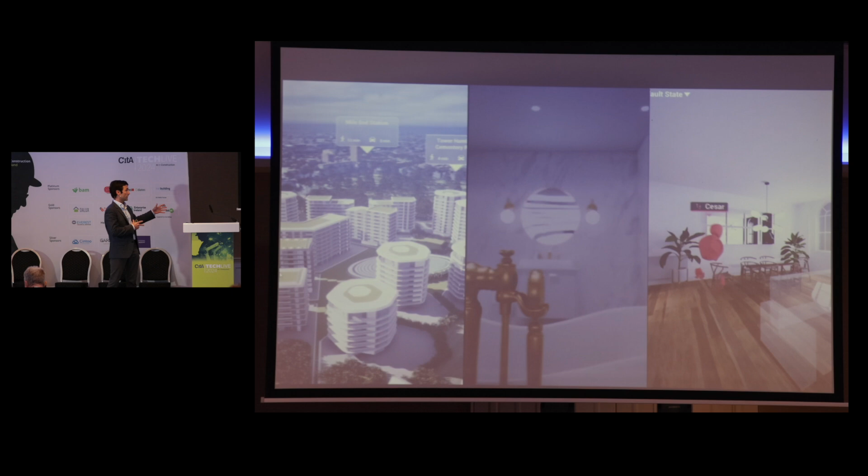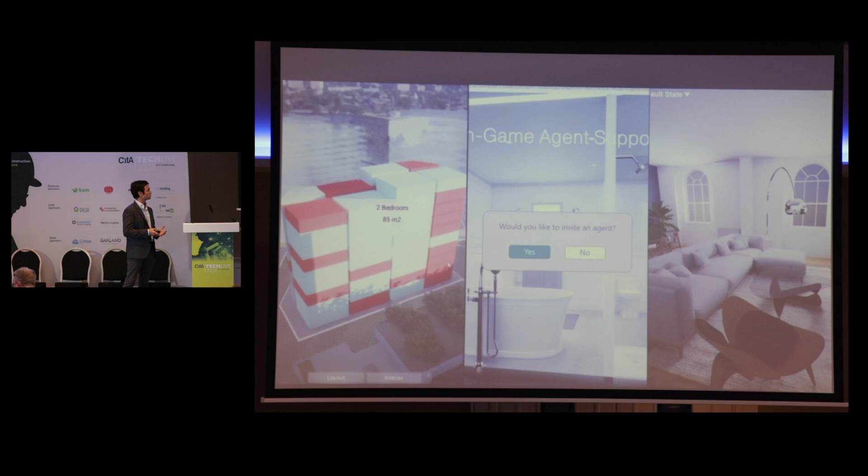We leverage a lot on our core business through automated design solutions, enhanced virtual experiences, and user participation in the form of exterior and interior configurators. We provide different bespoke solutions that are all cloud-based, could be real-time rendered, and we basically create a full software stack of solutions that, depending on our client's needs, we can adapt to.

One of the things we've touched on today is why are we doing this? One thing is to do things faster, cheaper, but we're very interested in making things better. So one of our main objectives with this technology is that we can actually go towards a mass customized future. And these are not necessarily new ideas.

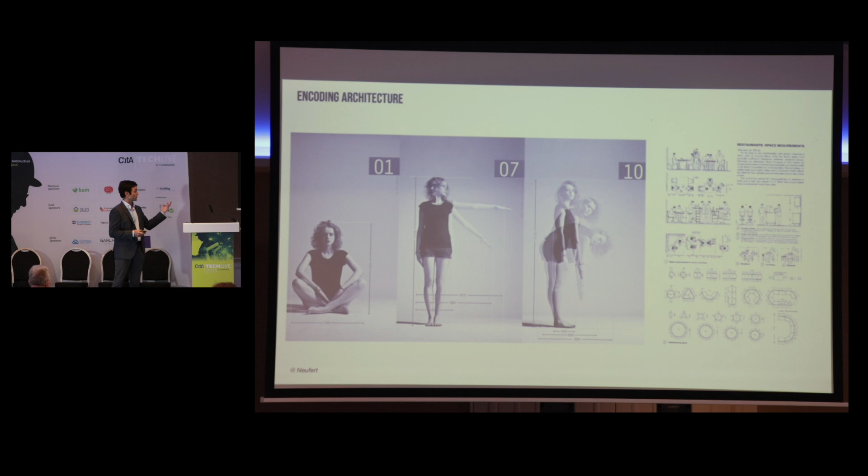Christopher Alexander, back in the 70s, wrote a book called A Pattern Language. Neufert as well, back in the 1930s. Probably if there are any architects here, you've been exposed to one of these books.

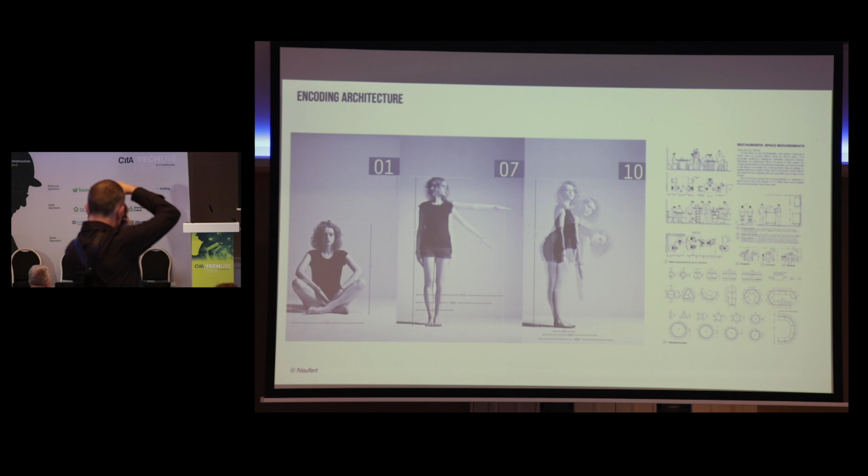So this has been very computational. At the time, there was not the technology, but this is all rule-based. How can we encode architecture into a set of rules? It's all ergonomics, it's all space-oriented. It's a system of relationships, right?

On top of that, the construction industry, especially the offsite sector, has learned a lot over the past decades from the automotive industry. Back to Henry Ford's assembly line in the 1920s, which was quite disruptive. But there are still years ahead to learn about fully automated factories.

Some things that have popped up in different conversations are about engaging buyers and mass customizing the future and the product, right? Like we can see in a way, buildings that could be configured differently. So that's something we started adopting as well in our core value.

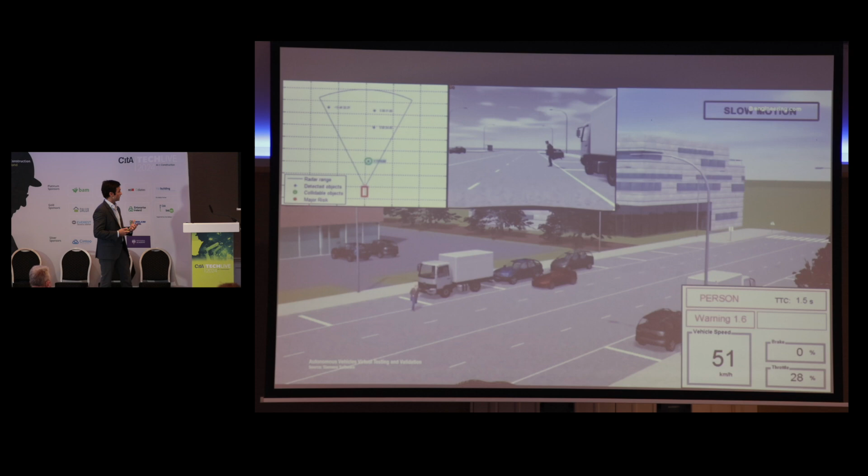A lot of these digital twinning simulations that these companies are creating bespoke to them are helping them design and simulate their next prototype, something we have to embrace and learn. Now, we stand on the shoulders of giants.

I started this journey after having a good career at Zaha Hadid Architects in the computational design group, where I was exposed to many projects, from competition all the way to construction. We had to create bespoke software to generate a lot of these complex geometries, and also create—I'll show you a couple of them—one is a configurator for modular housing, even though it doesn't look like it. But it was this intersection of knowledge that helped set the foundation of Alter.

Now with these projects—this one is made in Roatan, Honduras island. It's basically a small community of residents that came together, all modular, all made in timber in a robotic factory that is going to be shipped into the site.

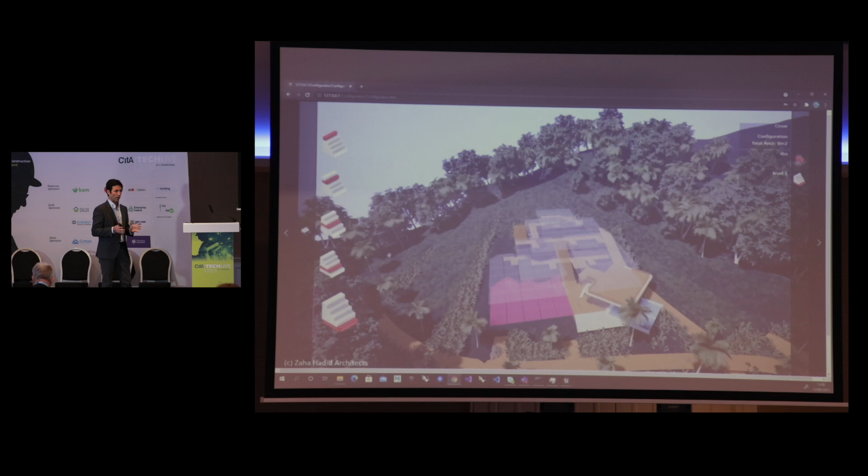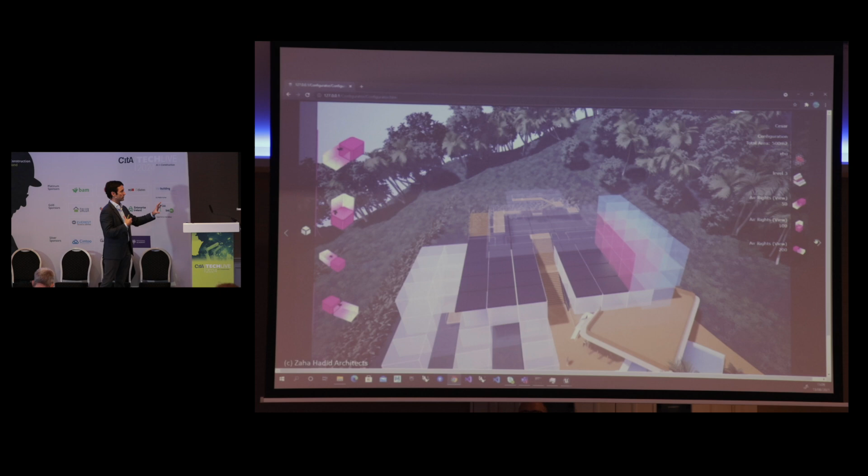In this case, we created a configurator just to understand a bit the requirements of the people who are going to live here. They had the option to select where they want to place a unit in the stack. As architects, we didn't want people just putting whatever they want wherever, but this served as a data gathering mechanism so we could start laying down the options—if I prefer a wide layout or a loft unit.

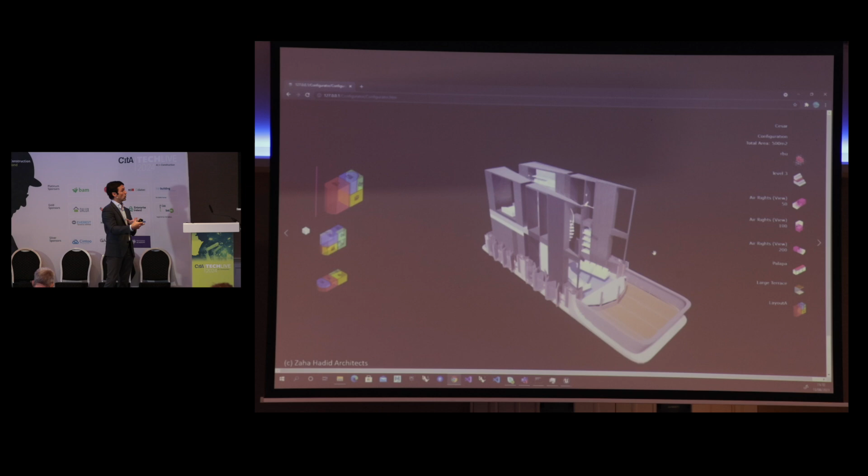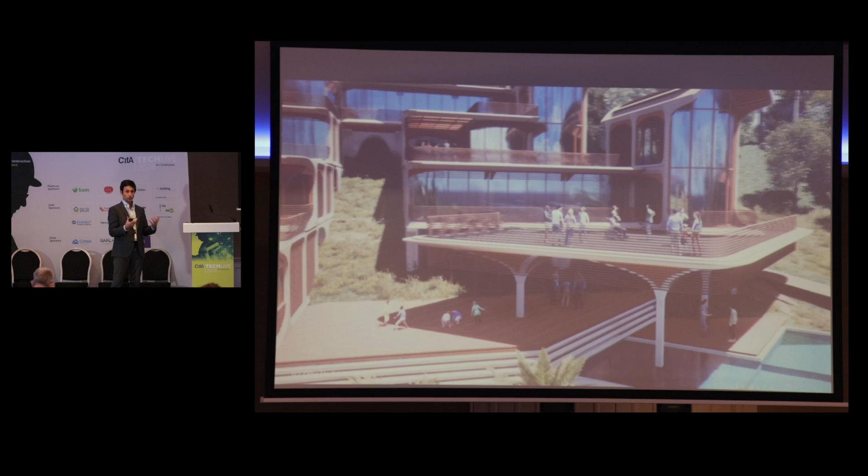If I prefer to spend a bit more on having a bigger terrace or a palapa roof, all this data then helped design and put together a community that came together cohesively, but also respecting what the people in this community were interested in. So it's about generating better designs through this system and through all the kit of parts that would assemble these projects.

Now, another project which I was quite fond of.

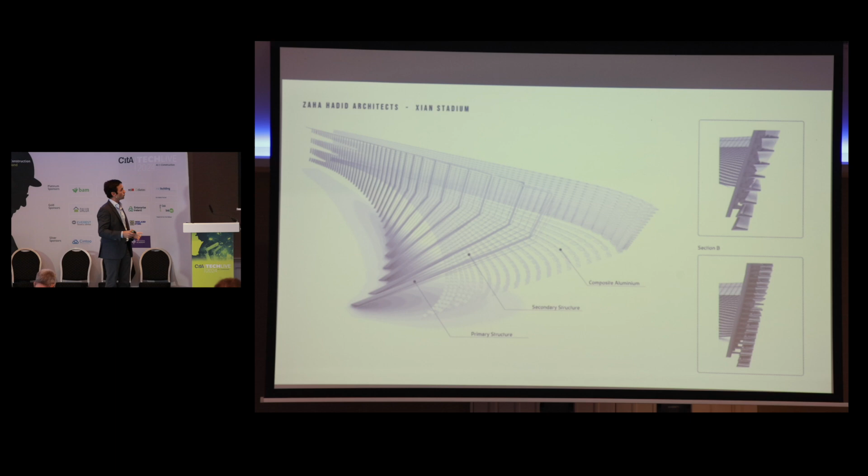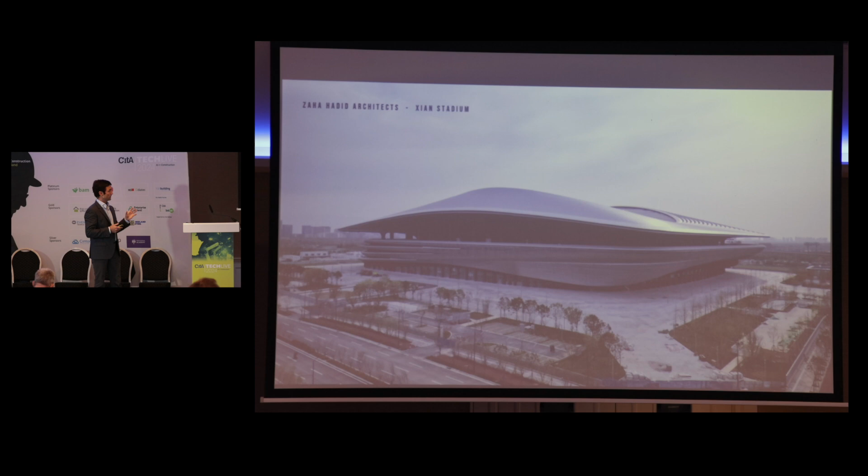This took less than 3 years to design, from competition all the way to construction, and it was only possible through computational design tools. The input of the whole stadium was only one curve. So reconstructing all the geometry all the way to the bolts and all the parts, having different AI clustering algorithms that would help shape and find families and rationalize all the design into basically a little kit of parts or components, while always respecting the final design intent. So back from the louvers to the paneling roof, that's all that knowledge wrapped up and created.

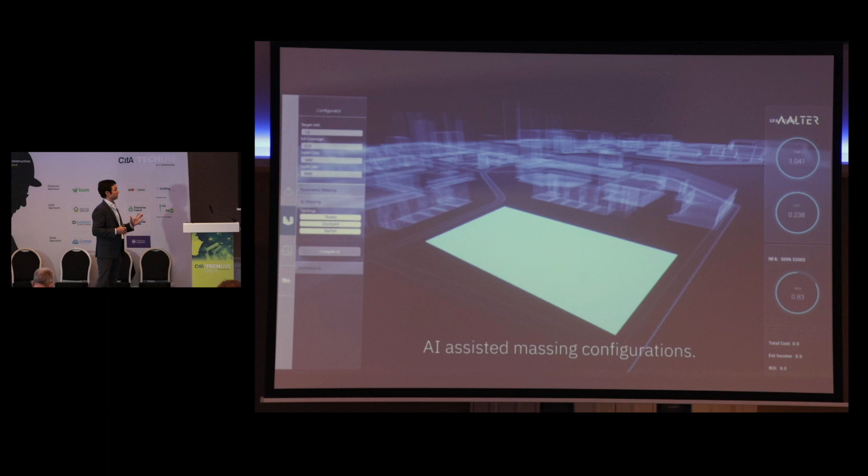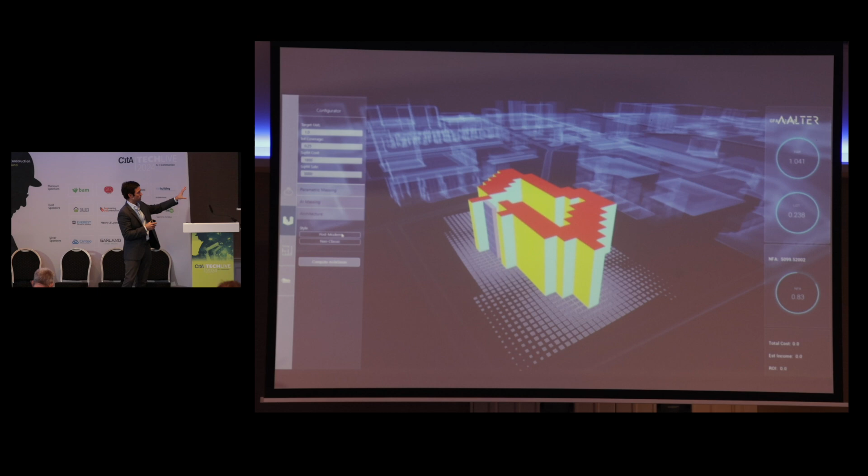So the first demo was still at CitA when I put this one together. It was basically collecting data from OpenStreetMap, so you can start generating and reconstructing different areas of the city, then select one site. Based on different zoning variables, an evolutionary algorithm would optimize different metrics—in this case financial metrics—but also within the bounds of zoning regulation and radiation constraints, analyzing solar radiation while it does all the analysis.

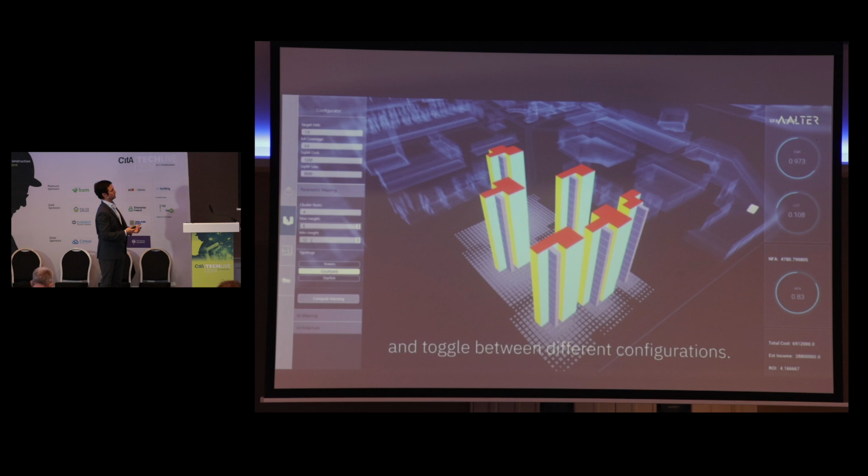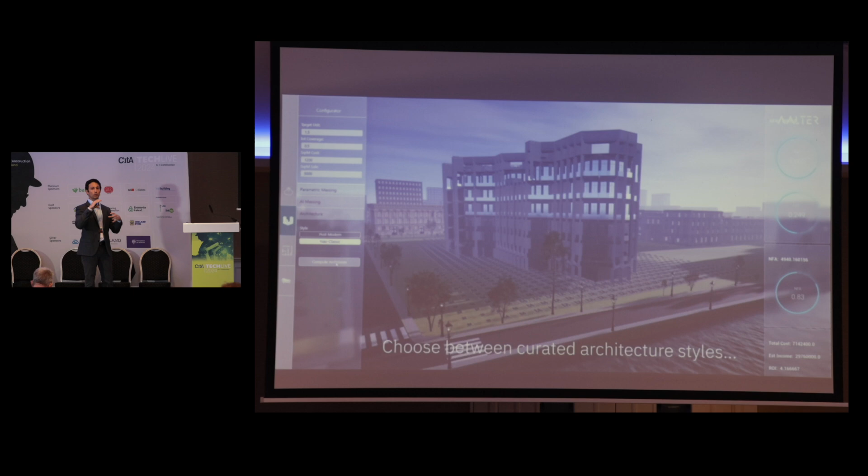But also as a user, you would want to override the system, so you could actually manipulate the parameters within a very easy to use UI—this is all cloud-based as well. Then very quickly, from a specific massing, you can have all the components out of a kit of parts, mapped, and you can swap very quickly between different architectural styles.

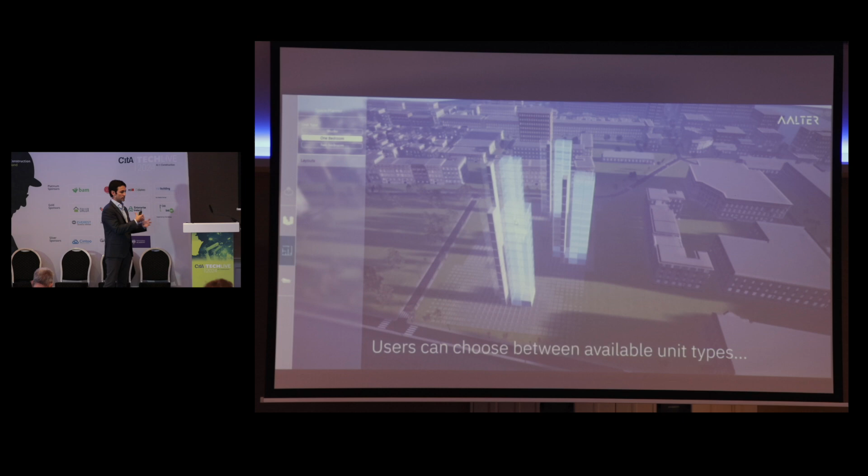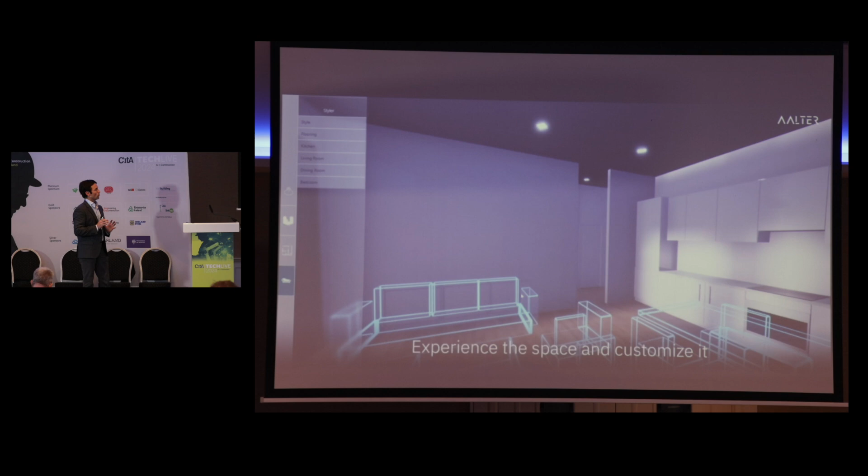Now the next module that lives separately is basically this tool that you can engage with for off-plan sales, or as a property manager you can start bringing in different people. Then we can establish the rules, whether we want to allow some sort of flexibility in the layout without affecting any MEPs or structure.

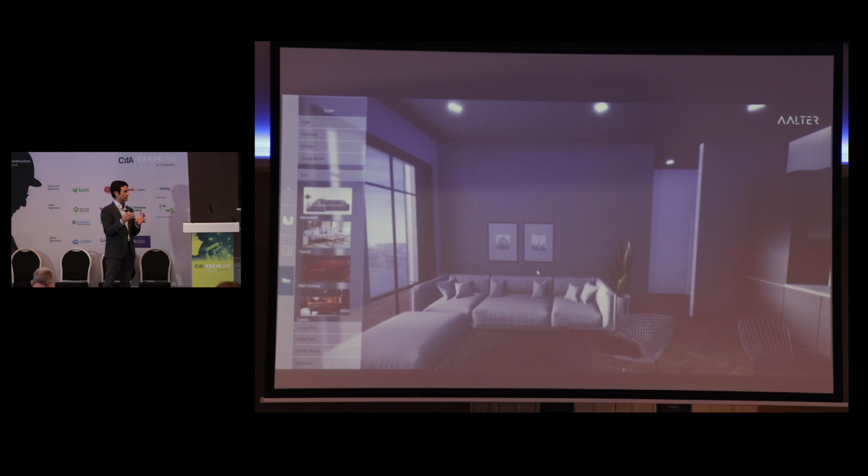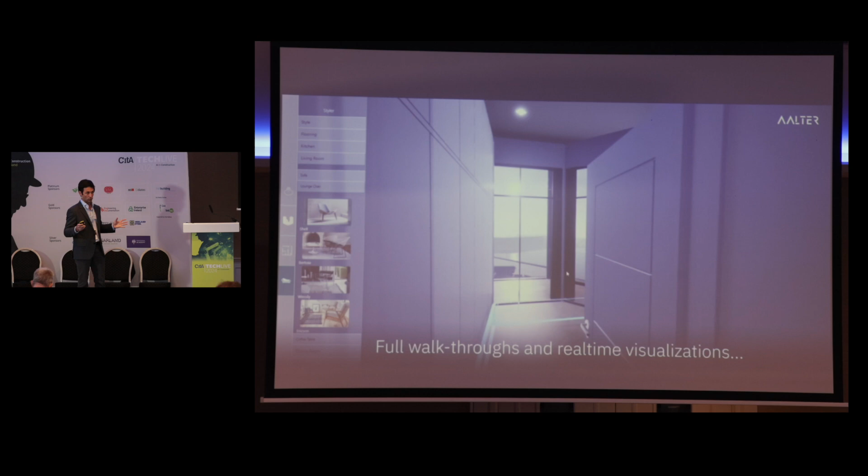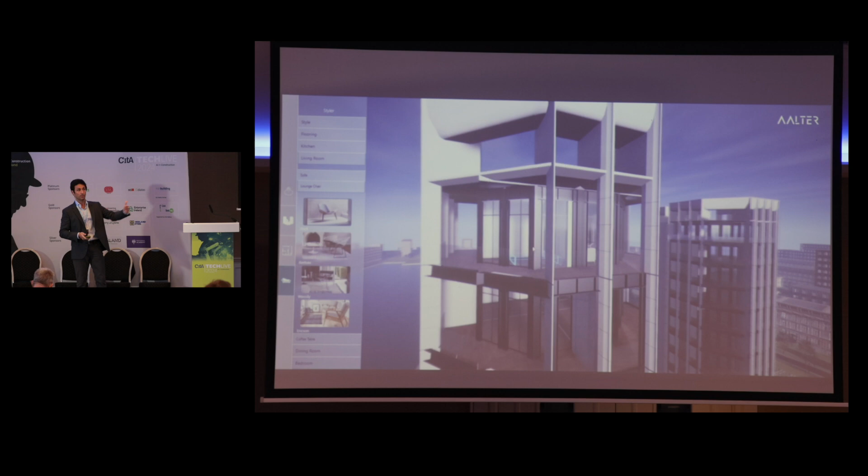And then having inbuilt interior design templates pre-curated, connected to databases of home suppliers, so we can very quickly allow customization for the users, and then experience each of these units as a first-person viewer in this property. It was like an enhanced experience, so you could be in any location of the property and see what the view would be, and what your neighbors or prospective neighbors are actually doing in their spaces.

Now all of this is wrapped in the vision of making expert design accessible to anyone—anyone could be literally like anyone. And the mission is to create better designed spaces, sustainably built, uniquely tailored to meet all those individual needs.

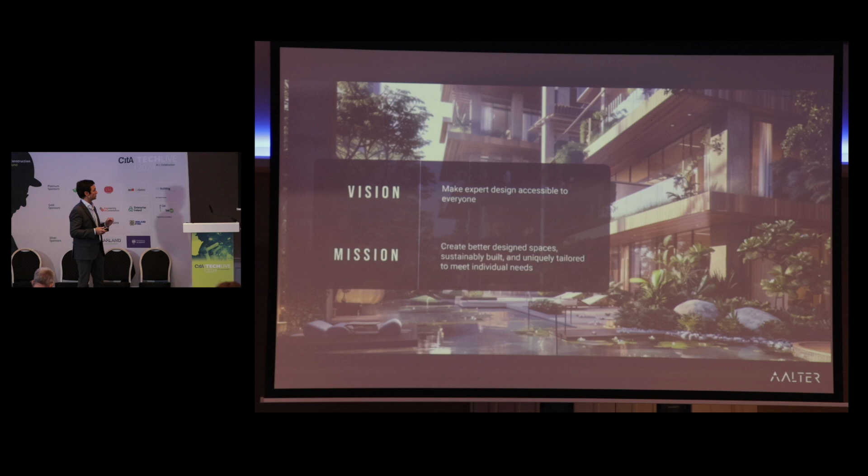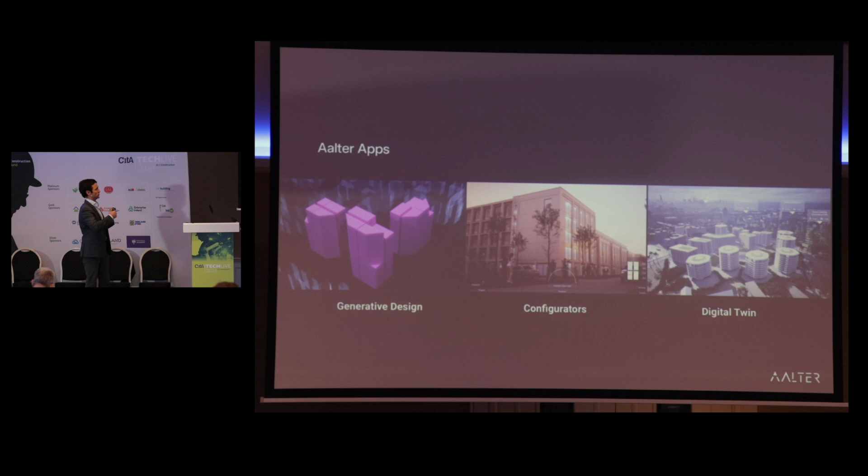We provide catered solutions to different stakeholders, all the way from the developer to offsite manufacturers, architects, home suppliers, all the way to the final homeowner. We stack these—we basically have a core technology that is modularized, and it can be grouped into 3 big themes: generative design up to the planning stages of a project, a connected configurator, and then something that basically lives on its own, a pseudo digital twin. It doesn't have all the sensor information, but it's something that lives, connects, and engages with the stakeholders and buyers early before it gets built, or even some of our clients are using it to manage their properties.

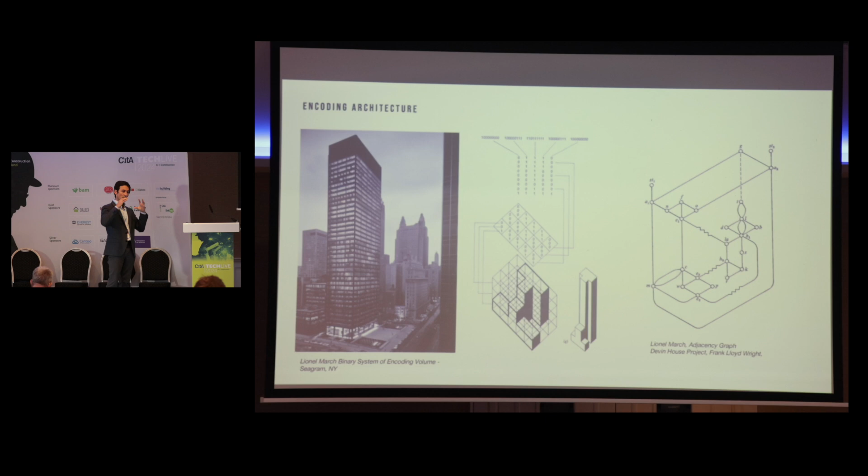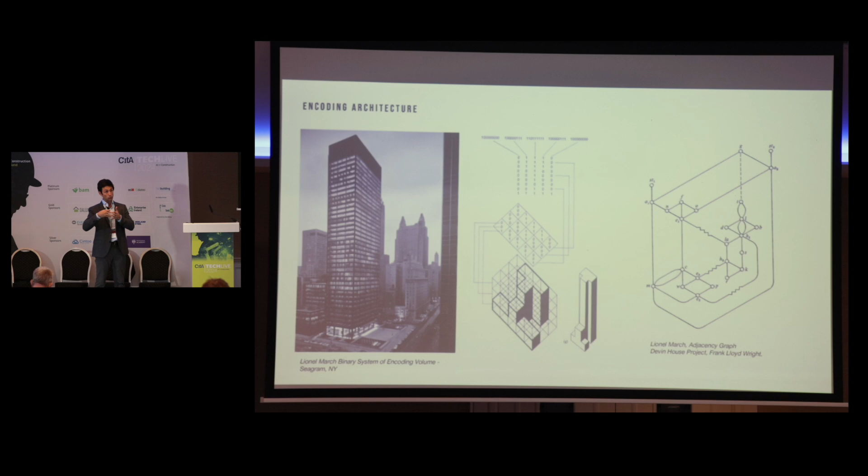Now one of the things we've realized is important is how do we encode architecture and how do we encode a building. We've been involved with academia for a while, and this is also not new—a lot of technologists and people that know software systems would be familiar with graph systems and graph theories, a system of connectivities. That's the way we've been abstracting a building and an architecture, and serializing all our data into a set of components that has a set of relationships not only between themselves, but also with the urban context.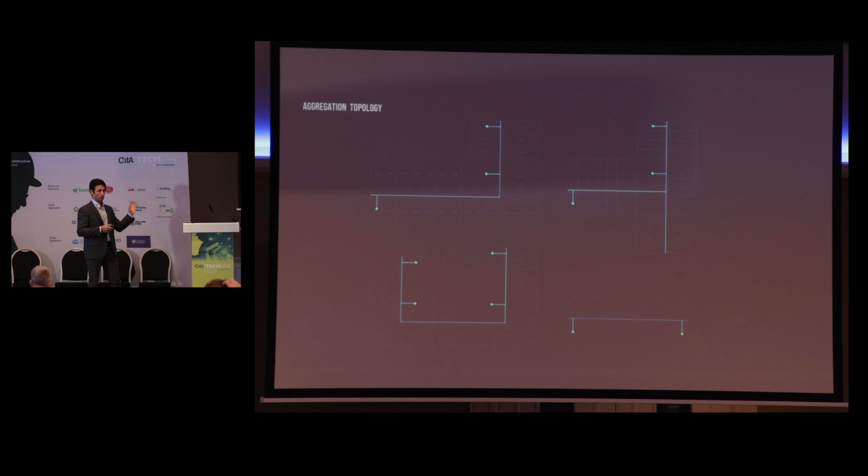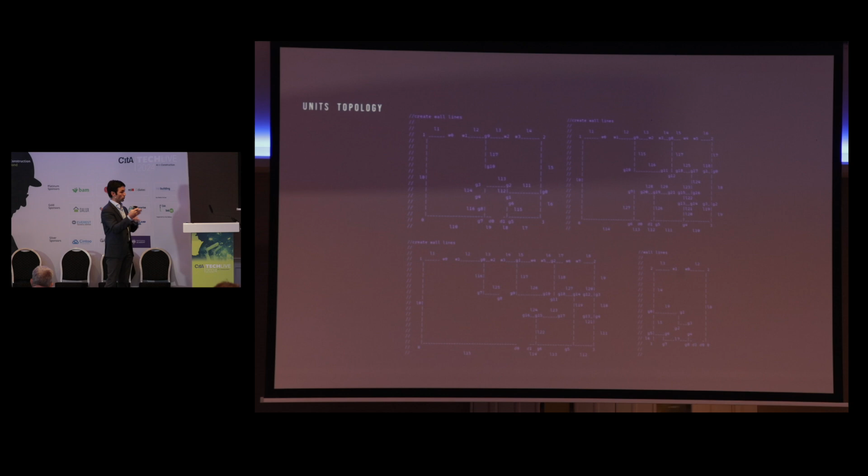So that way we can very quickly and easily start computing different options of layouts for different buildings, computing different fire escape distances at different scales, and also the layout of each of the units, where we can start identifying or quickly generating, procedurally, all the interior walls for any property. Each interior or each wall would know if it's an interior, if it's an exterior, if it would have any MEPs associated.

So all the labeling process that's been done manually, we can just encode. These we can adapt to anyone. One of our clients does modular housing, focusing on PBSA, student accommodation. We've created a system that can quickly adapt to any site, any condition.

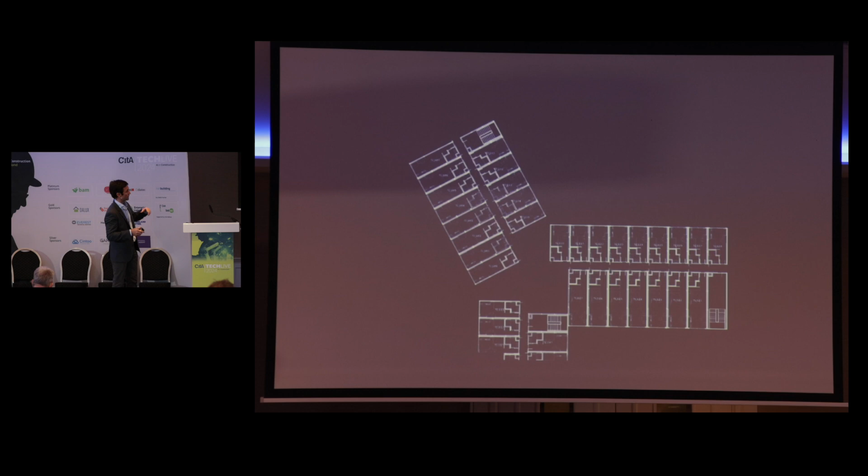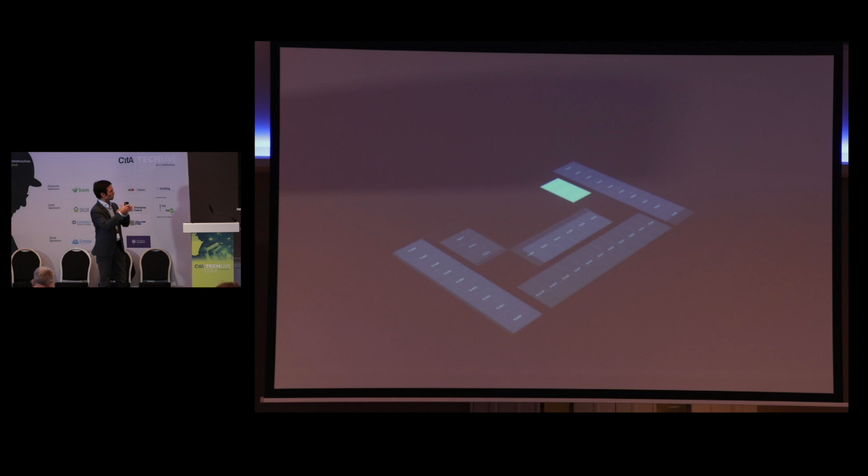It will start computing fire escape distances. It can also map or adjust to consented schemes or different sites, and it will run different generative evolutionary algorithms, sort of an AI, optimizing to find the correct parameters to maximize the target - net sellable area, target mix ratio - and then produce all the kit of components that can be easily exported to BIM.

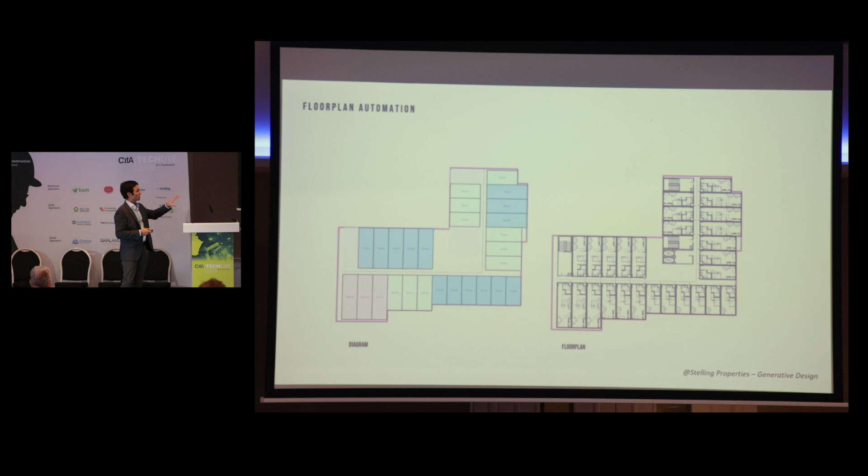As software developers, we're quite interested in speed, so we can go very quickly between levels of detail, out of diagrams that have all the metadata needed to then very quickly iterate and create all the CAD information and layouts, but also most importantly export all the real-time data, schedules of accommodation, bill of materials, in real time.

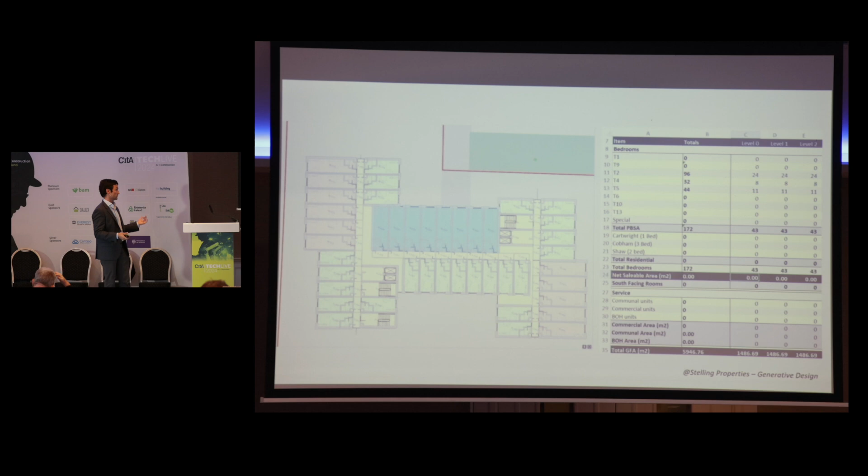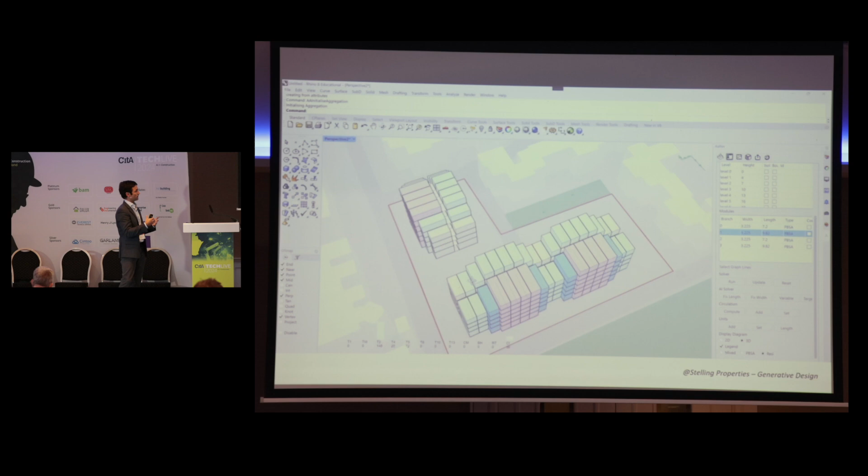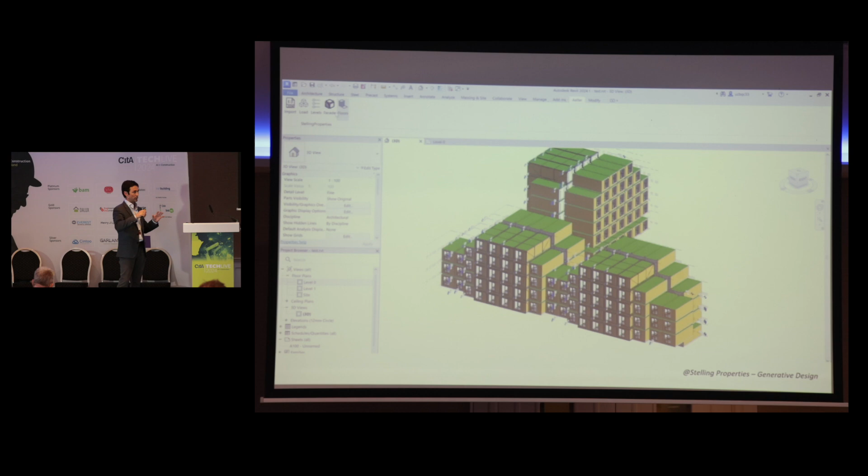It's very important to allow humans - either ourselves or the designers using the tools - to quickly modify and shape the buildings, and then all the information would be parametrically reconstructed. Being an agnostic software company, we leverage a lot of data, so we can easily move all these components between your preferred software.

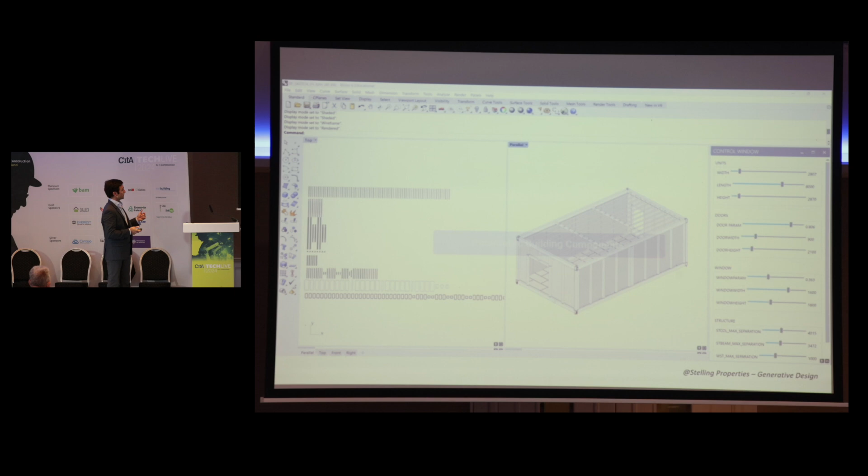So we can export from one to another - in this case, it was Revit. Depending on the client's requirement, we can also start parameterizing all the building components back to the bolts and how these sets of relationships work.

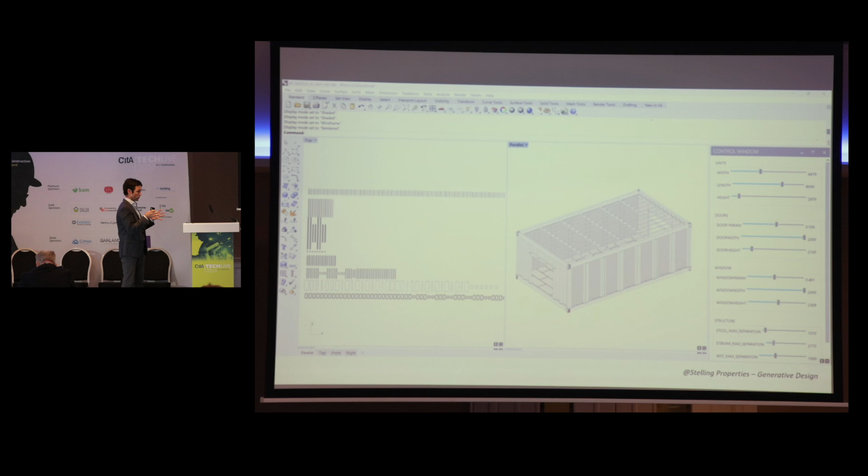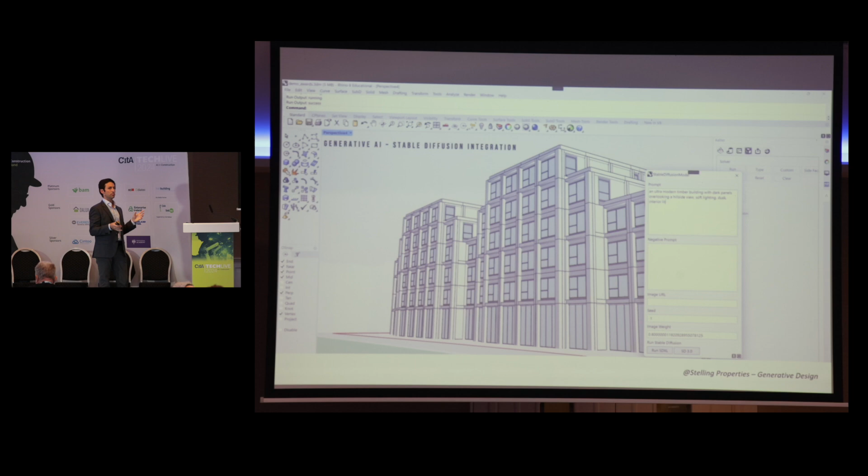Since the master system now has the overlay of all the units, the next level system can discretize and deconstruct all the components of the units, back to the panels, back to the bolts, to get bill of materials. Some of you might be familiar with Midjourney and ChatGPT image generation.

Right now you can prompt something and get an image, but it's quite uncontrolled. How do we build this? We reverse-engineered it in some way, so we've been training our own custom generative models in order to match the parametric model.

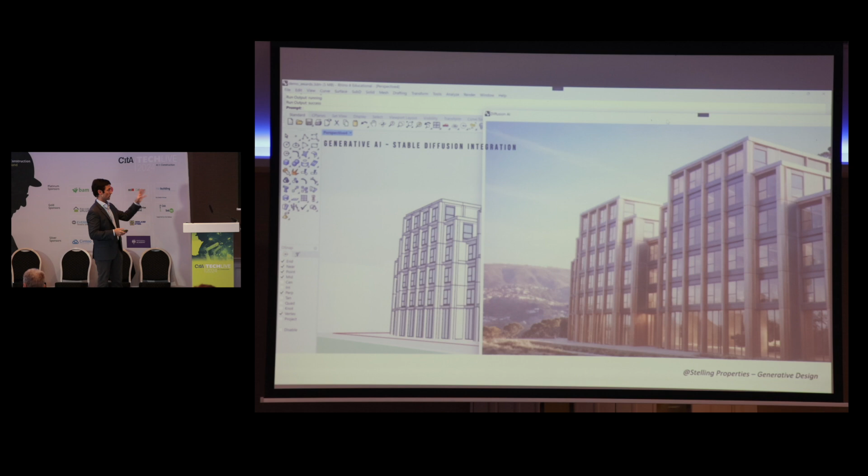That's why we can organically create some of these diffusion models, trained to our customers' styles, and also matching the parametric model information. That's why we have a lot of control - we can always have the same site, the same building view, every time we iterate over prompts in different styles.

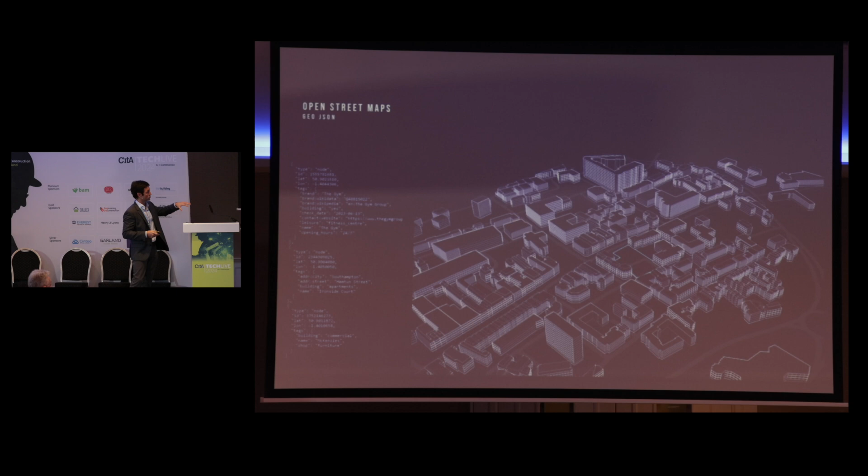Now we could go even further. We can get OpenStreetMap data, reconstruct cities in 3D, extract all the diagram information, view analysis, height analysis, and start automating all of these.

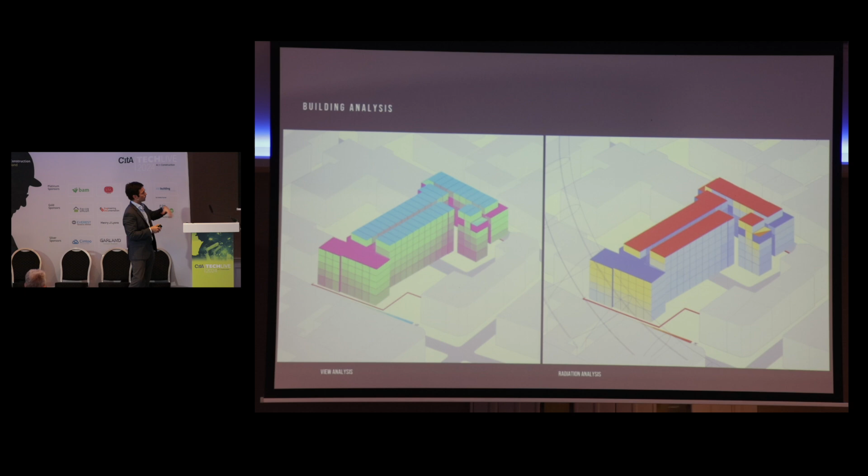This has been quite useful for planning applications or site identification for some of our clients. Or we can run anything we could compute or quantify, such as environmental metrics, solar radiation, view analysis for each of the units, so we can optimize, or train the algorithm to optimize for any specific measure. We're going to add carbon emissions and wind analysis very soon.

That's something some people have been interested in. Since we are quite young, we're looking to find strategic partnerships, and these first partnerships are helping us shape the platform to their specific needs. We want to add value very early on.

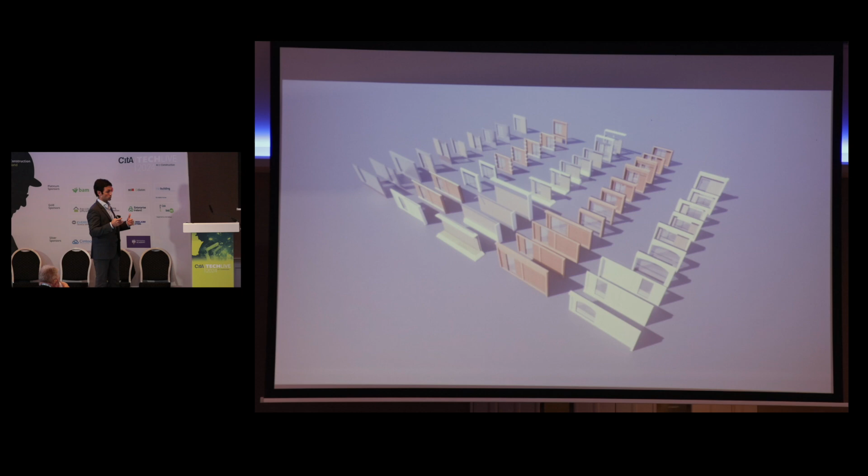Now, on the configurator side, our system works through a kit of parts, so we can design with our clients a different style set of kits, based on different massing options that were done by the generative tool.

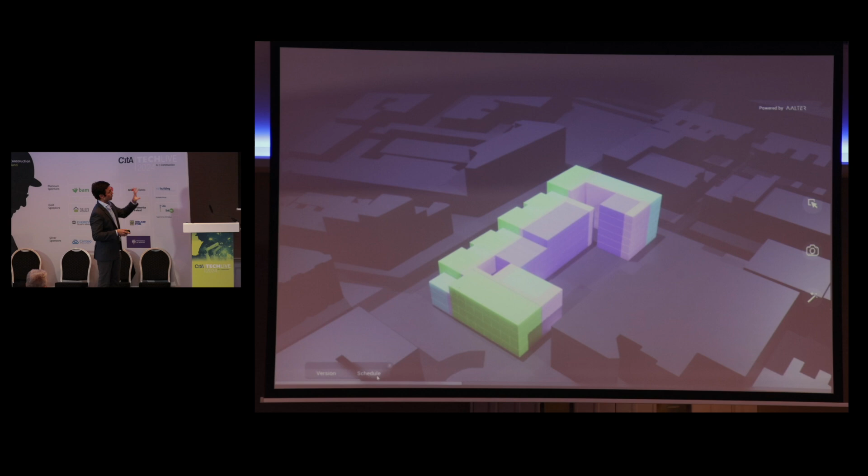From the cloud-based platform, this runs straight from the web. For a user that isn't technically drawn to CAD, we just create a very easy-to-use interface that they can toggle between all the design studies that have been pushed by the designers.

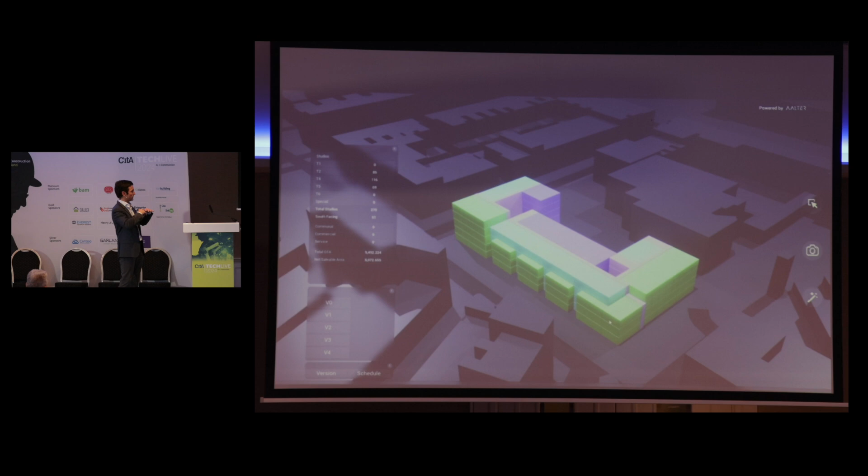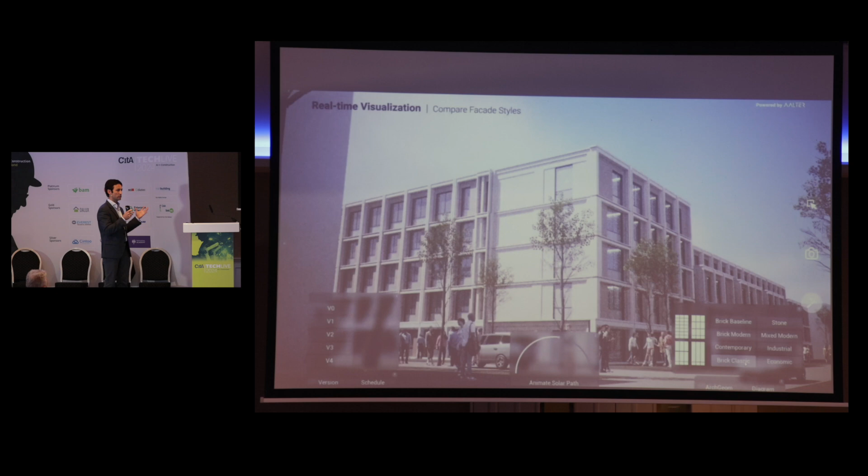And then they can start visualizing this in a real-time rendered platform. They can run different solar analysis, but most importantly, they can start actually swapping between different kit parts, so you can see how that building would look in that specific location.

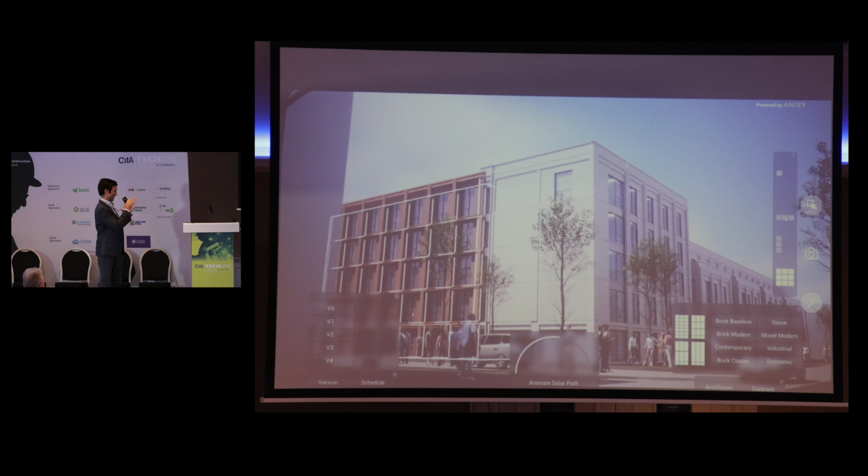You can start not only changing the kit, but you can say you want to fix a style, and then iterate it back again through all the massing versions that has all the metadata and information of that specific site. Then also start customizing parts if you want to make the building slender, or change some materials.

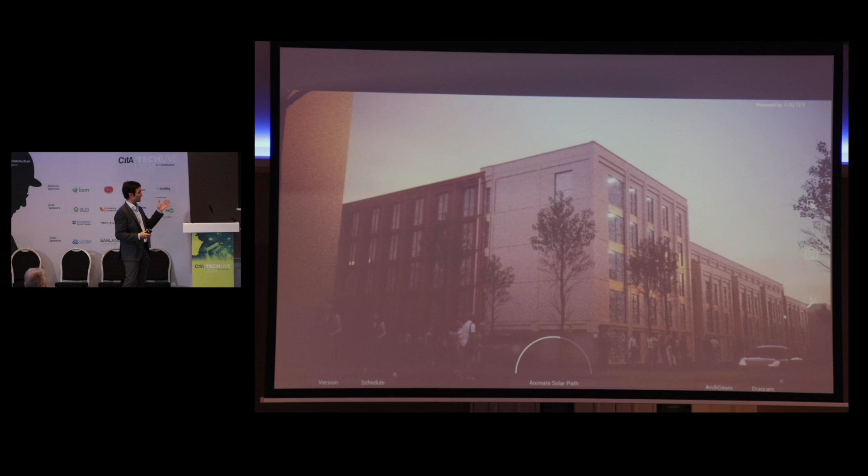All the sites, all the props of people, trees, it's all procedurally generated, so we can automatically export CGIs out of these. It's a realistic CGI, something that our clients were outsourcing before, now they can have a tool to export all of these in-house.

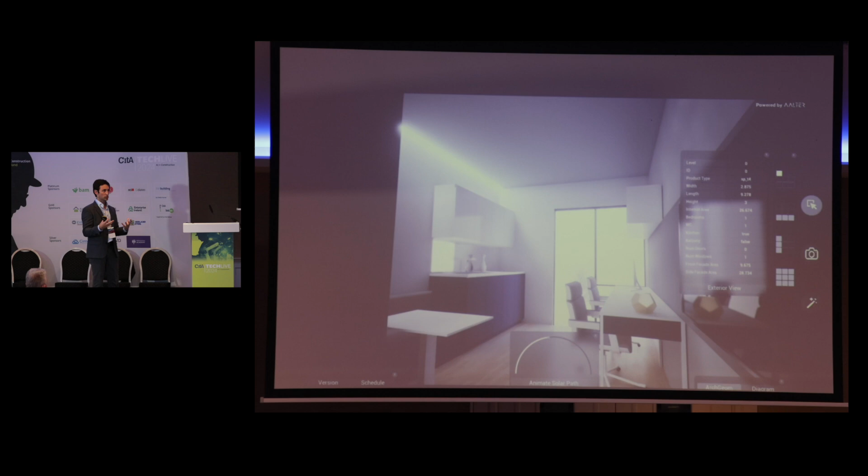And then they can start engaging with different stakeholders. They can even take them to any of the units and show them inside each of these spaces. It's holistically exploring and having a different way of presenting your projects based on data, so you can have all the data of that specific unit and all the data of the whole building in one platform.

And then connected to Cesium and different Google photogrammetry, we can actually start embedding these configurators into the site and see how it performs on the site.

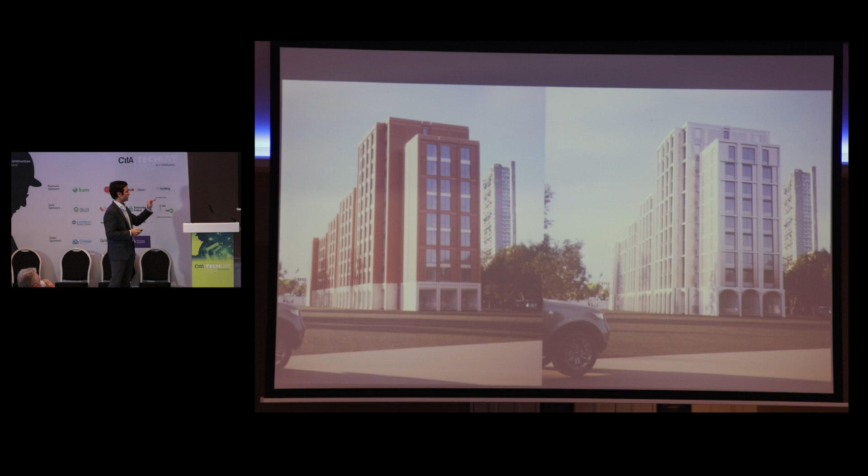Now, these are some very quick examples—based on a button, you can generate this quality of CGIs and just start iterating over different styles very quickly.

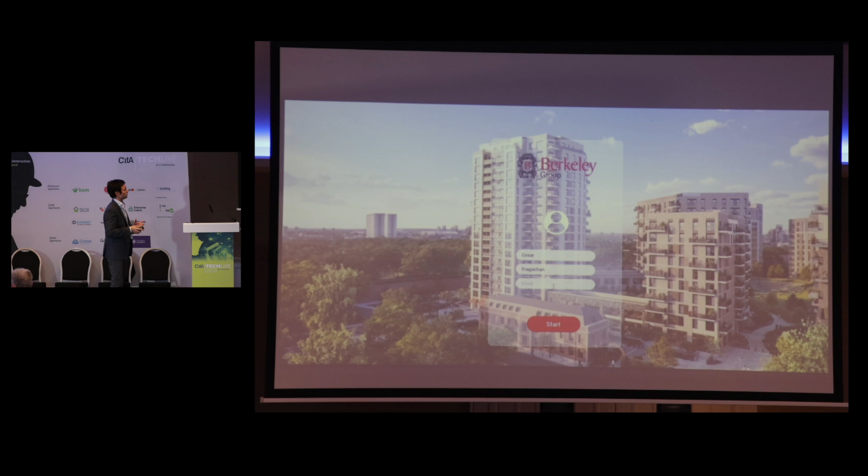And then lastly is the digital twin. In this case, we've created a couple of prototypes for some of our clients. One of them is like a twin, basically the site, where depending on what our client wants to expose...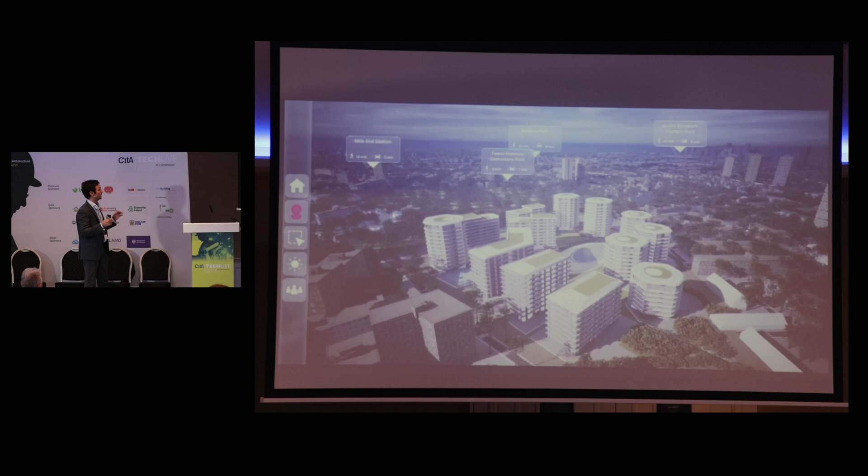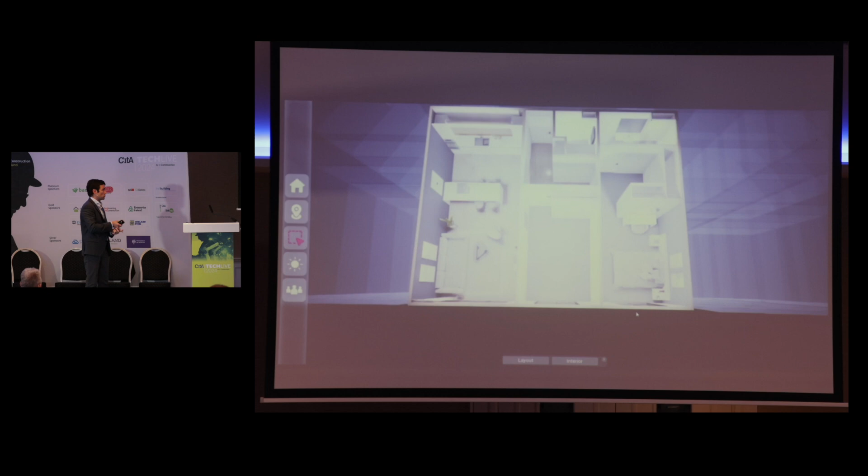In this case, it could be information of points of interest in the site, different phasing information of that specific development, so we can lock parts that are not yet available. It's connected to either their CRMs, or we can just create the back end to have all the management of the units, showing which ones are available and which ones are not.

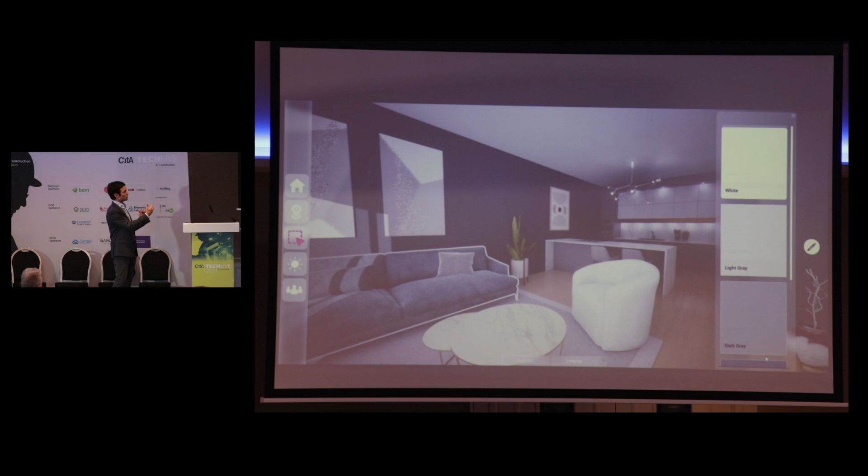But then engaging seamlessly with people, this is just running through the website, or it could be running through an iPad in the suite or in the office. You can start toggling between different units—every unit becomes its unique showroom, its unique way of exposing and expressing the design potential of every possible space.

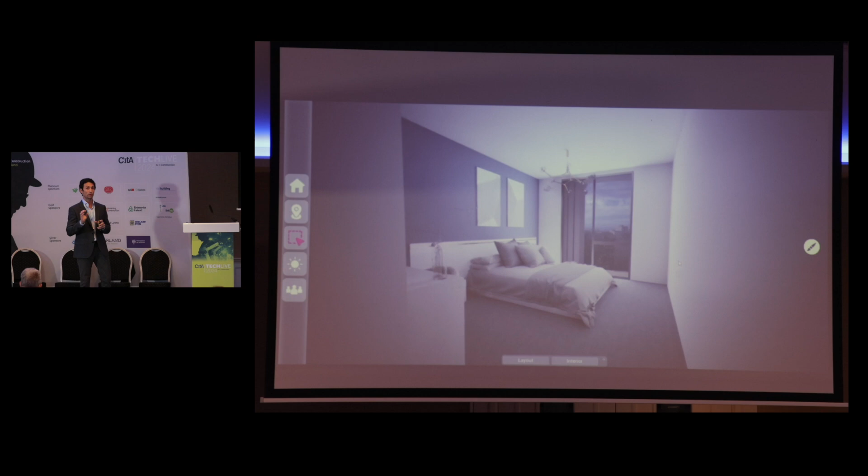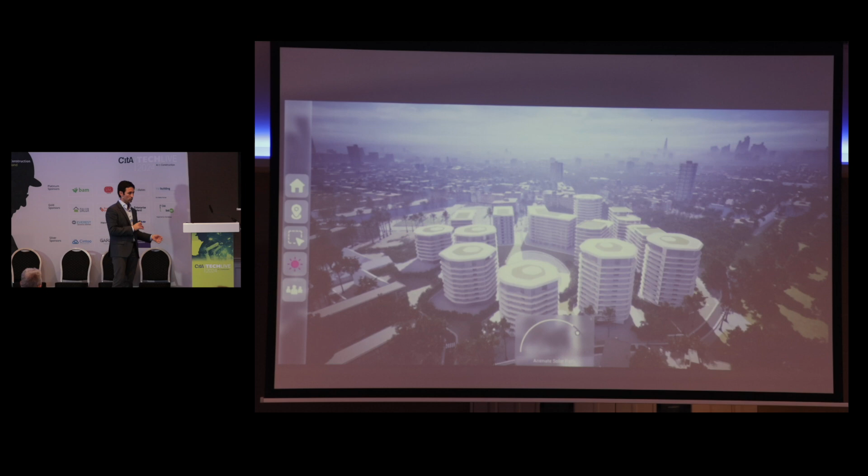That's what we want to aim for—helping tools make better designs for everyone. Prospective buyers can then start seeing how's the look of that city, how's the look of that specific apartment, how's the solar, the sunlight exposed on any particular corner of the development. And this is the actual quality, not animated, that you get straight out, leveraging state-of-the-art game engine technology running as seamlessly as possible.

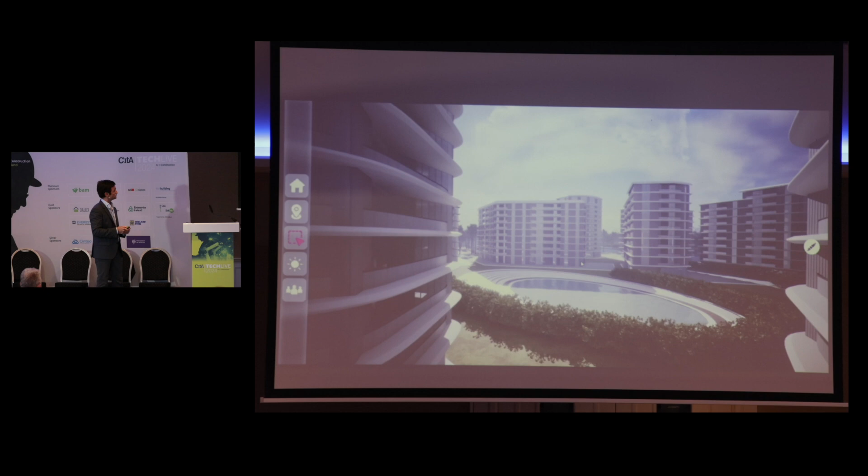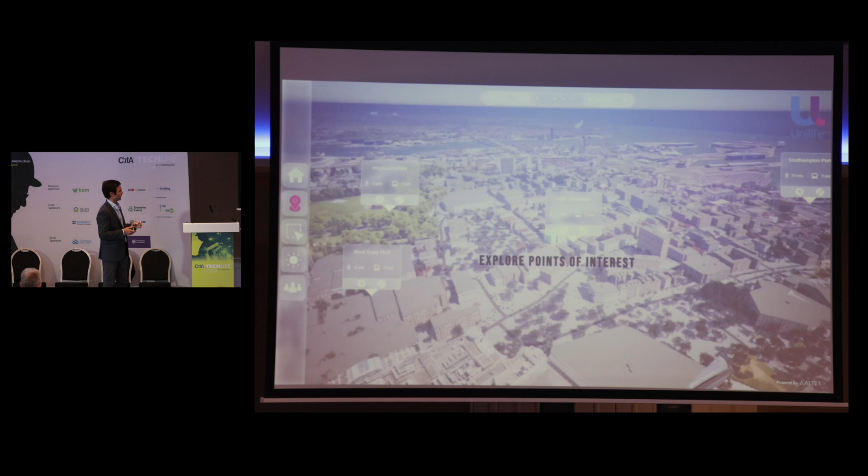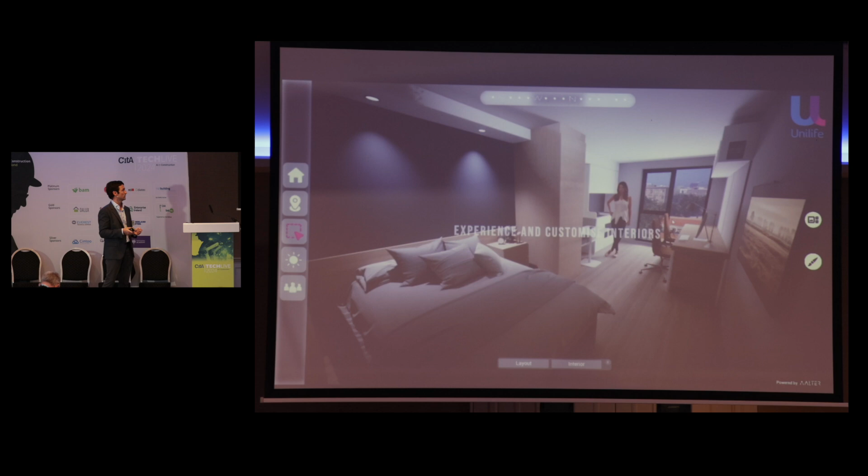And then the last one, the beta version, was just released a couple of weeks ago. It's for Unilife, a student accommodation property manager, so they can start connecting to their CRM and showcasing to students that are overseas—a lot of their students come from China. So they can allow these in any platform, so they can start visualizing what would be their home for the next year. It's something that becomes just a twin for years to come.

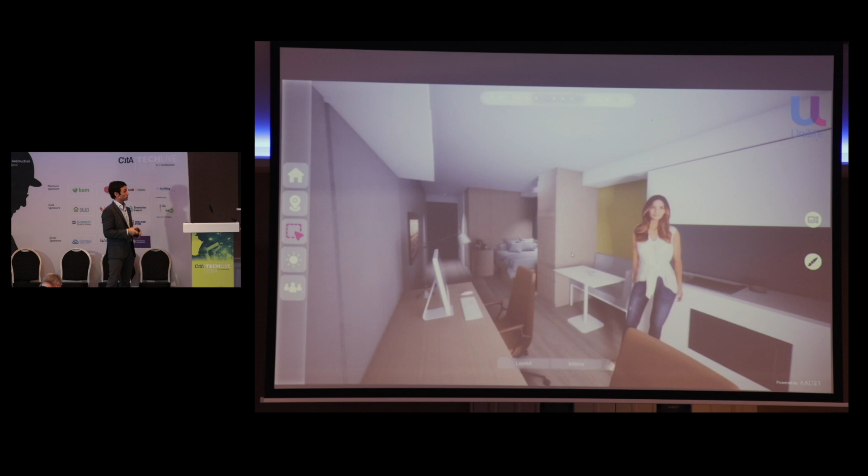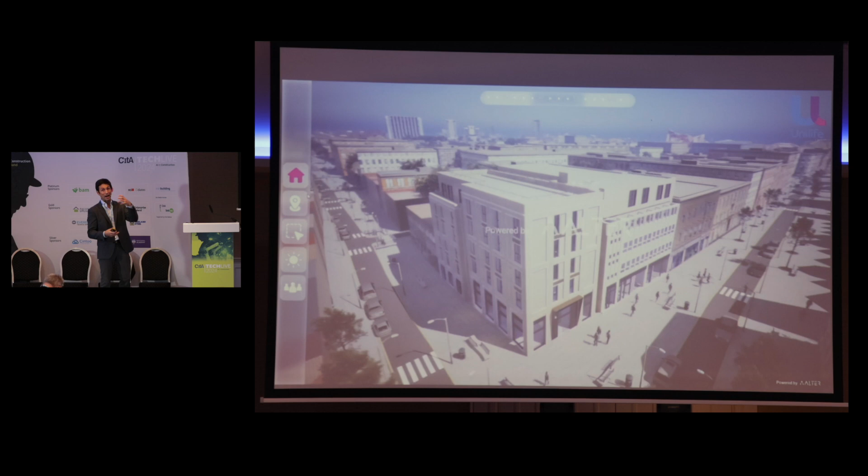It's not just taking information from the built model, but it also goes out through the life of the city. We're trying to see if there's value to add extra levels of information, but definitely we want this to be a serious digital twin, so we can have informed decisions based on usage of the building and then inform back the design. If we could always feed it back into the design and the system, that's where we're kind of interested in the long term.

So yeah, we're basically helping our clients and our partners to design, build, and sell faster, but most importantly, build better looking and more sustainably built buildings.